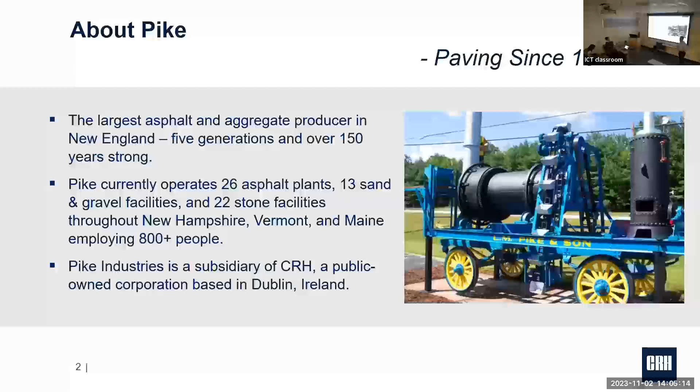Just a little bit about our parent company, CRH. CRH is one of the largest construction building materials businesses in the world, employing over 75,000 people at about 3,200 different locations in 29 countries. And our operations span 29 different countries on 4 continents.

And in North America, we are the largest building material business in this continent, with operations in 48 US states, just besides Alaska and Hawaii, and 7 Canadian provinces. And on the other side of the Atlantic, we are also the largest building material business in Europe, with operations across 23 European countries. And in the Asia Pacific market, we also have a regional leadership position.

So this is what we're going to cover and talk about today. I'll first give a little background information about the Buy Clean policies, the EPD implementation status, the NAPA asphalt EPD generation tool, and the recent NAPA benchmarking effort. And then spend some time to talk about some of the key drivers and improvement opportunities, especially for the asphalt producers and contractors. And then I'll touch on a little bit about the research and implementation needs, not just for the asphalt contractors, but for the whole asphalt industry. And then wrap up my presentation with a couple key takeaways.

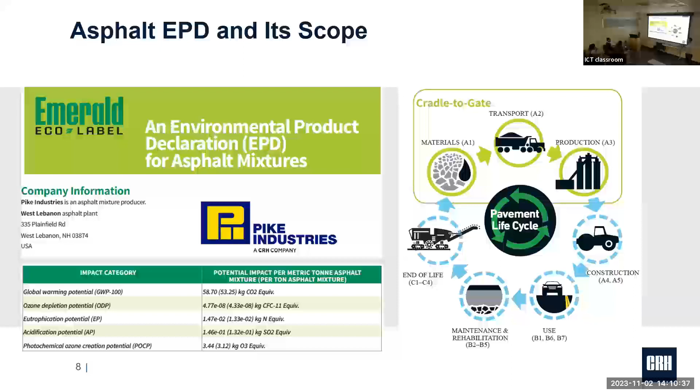This is just a quick peek of the NAPA Emerald Eco Label EPD tool. If you've never seen that or haven't gotten a chance to take a look at it, I would encourage you to check it out just by typing asphaltepd.org.

The tool was designed mostly for asphalt producers to generate asphalt EPDs. However, even if you're not a user or if you're not an asphalt producer, you will have access to all the published EPDs. You can see all the published EPDs from this website, from every state. And if you need any information, for example for research, you can just go into each EPD from each individual state and check out the information.

Another great thing coming with this tool is it has a module called EPD Optimizer, which would allow the user or the asphalt producer to see the impact on EPD from variable changes, such as haul type, haul distance, and fuel type, etc., and get an idea how to possibly optimize the EPD for a specific case.

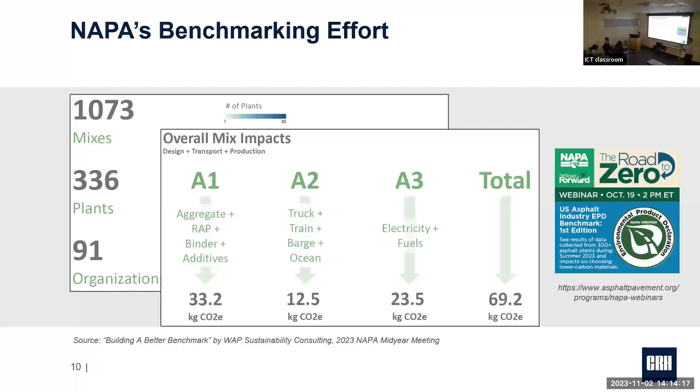All right, next I'll spend some time going over some of the key drivers and improvement opportunities, mainly for asphalt producers and contractors.

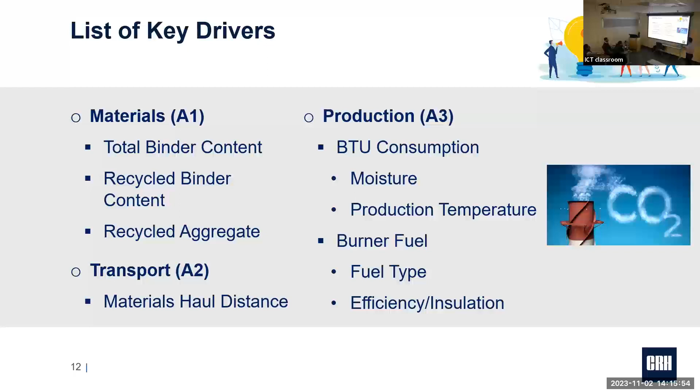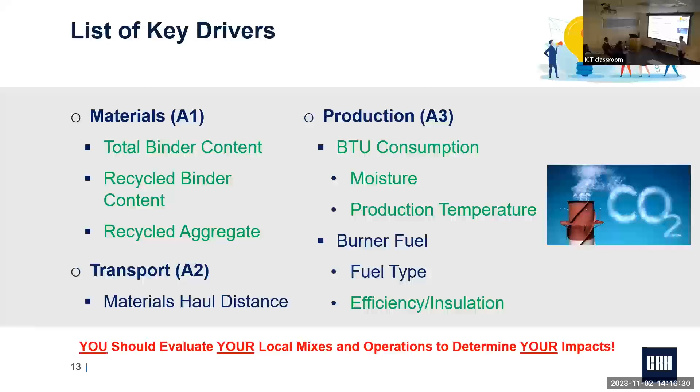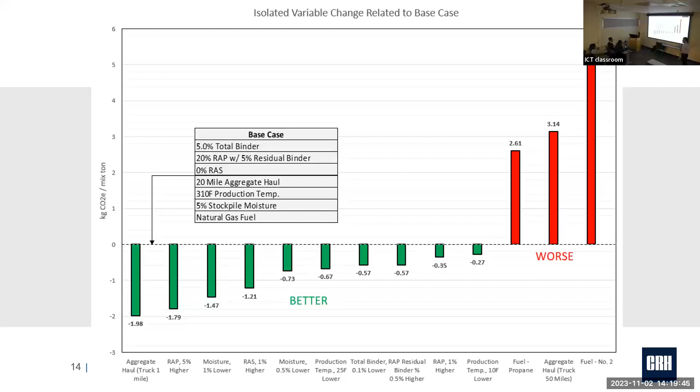And if we don't have any suitable aggregate source within the 20-mile distance and we had to truck further, say 50 miles away, we would see an increase of 3.14 kilograms per mixed ton. So those examples just give you an idea of how each of those different drivers or factors can really affect the GWP or the CO2 from this example mix.

So let's take a further look at a couple of cases or examples at each of the 3 stages: material, transport, and production, and see the sustainability impact and what kind of opportunities may exist out there.

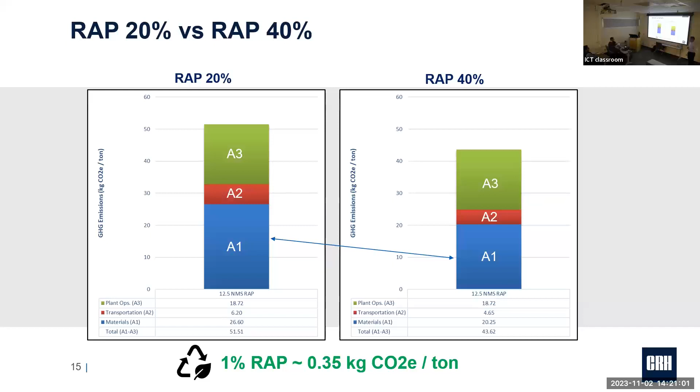So we see the significant sustainability impact as the asphalt producers and contractors. How can we really seize such opportunities? One of the first things for the asphalt producers is to maximize the addition of recycle, especially on non-agency mixes, and take advantage of the rejuvenator to balance out the stiffness and relaxation properties coming from the recycled binder.

And we should also maximize the residual binder in the recycle through better RAP management and processing, and consider the final grind size for the recycled asphalt shingle.

Contractors need to consider and invest in plant modification, such as increasing the recycle bins, changing the flight design within the drum, switching between drum and plant types, and increasing the size of the RAP collar, etc., in order to accommodate higher recycle use through a better feeding system.

Contractors should also limit the moisture in the RAP, and work closely with the specifying agencies on their specifications.

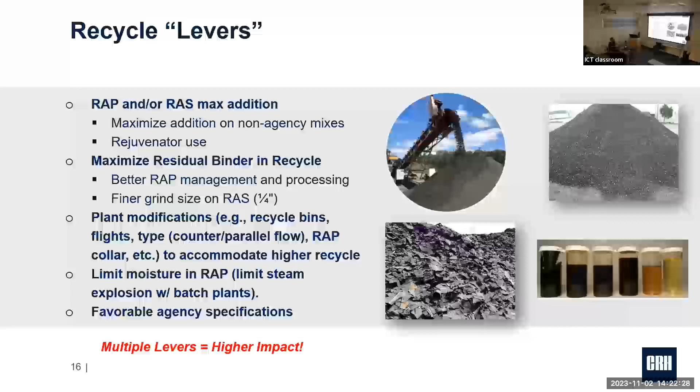Another big part on the material side is the virgin binder demand. Asphalt producers should always right-size the total binder in the mix, especially avoiding over-designing the VMA, as every 0.25% VMA equals about 1/10% of the binder, which would have a sustainability impact of 0.57 kilograms CO2.

Producers also need to consider the asphalt absorption whenever possible when selecting aggregates, because if we compare the aggregate blend with just 1% absorption versus 0.75% absorption, that 0.25% absorption difference would have an impact of 0.72 kilograms CO2.

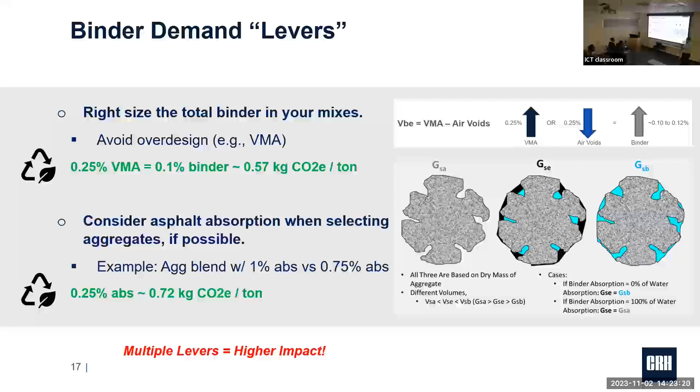At the transport stage, aggregate sourcing and aggregate transport can greatly impact the CO2, especially for aggregate-poor states and regions such as Florida and Louisiana.

So using locally available aggregates can reduce the CO2e impact. However, as a producer and also agency, we need to keep in mind that performance must still be achieved.

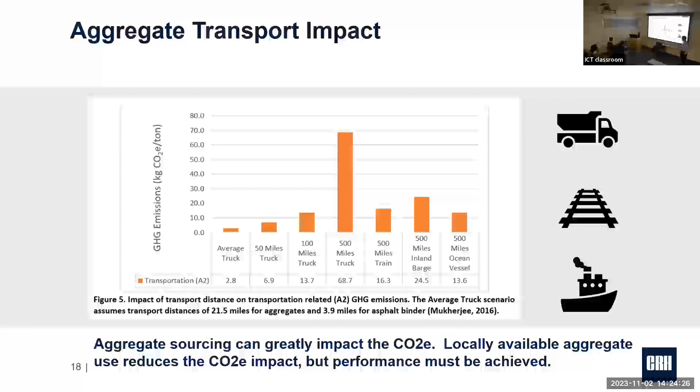On the production side, there are a couple of main areas for asphalt producers to continue working on. The number one thing is stockpile moisture, because moisture existing in the aggregate either needs to be drained out or dried out. Producers need to consider paved and sloped stockpile areas for better drainage, and consider using covers over the stockpile.

There's a rule of thumb called 1-11-11: every 1% moisture reduction in the aggregate can reduce BTU consumption by 11% and increase the production rate by 11%.

Another main area in production is the plant production temperature. Asphalt producers and plants really need to evaluate and determine if a lower temperature is achievable at the company level and also the plant level, just by asking themselves a list of questions like this.

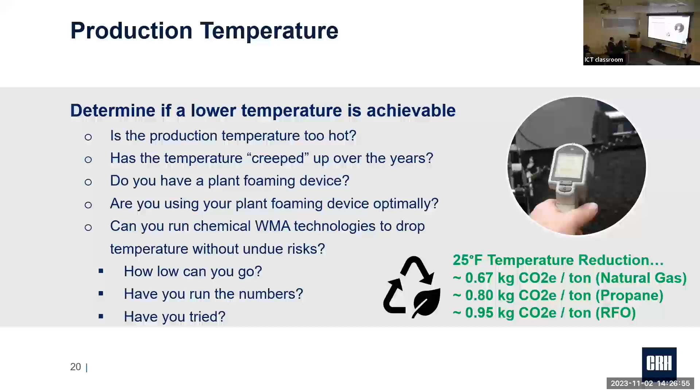We've just talked about a couple examples at each of the three stages, such as the use of recycle and virgin binder demand on the material side, and warm mix or temperature reduction and moisture control on the production side. Here is an overview or summary of the sustainability impact from each of those key drivers.

For recycled asphalt pavement RAP, every 1% RAP has an impact of 0.35 kilograms CO2 per mixed ton. Every 25-degree temperature drop can reduce CO2 by 0.67 kilograms if using natural gas. Every 1/10% binder reduction can lower the GWP by 0.57 kilograms. And every 1% moisture reduction can reduce CO2 by 1.47 kilograms.

So just a disclaimer here: these are just general estimates based on a specific example mix, and everyone's local conditions will drive the actual data.

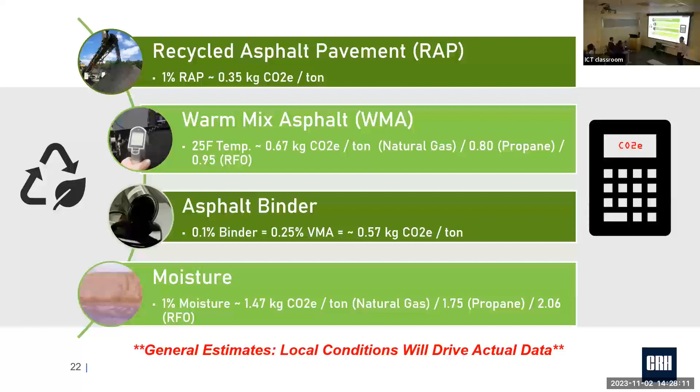All right, next I'll touch on a little bit about the research and implementation needs, especially for the research community, but more for the whole asphalt industry. So on the materials, we need to continue to search new forms of binder and binder replacement, such as biogenic materials like bio binder, bio asphalt, etc. We need to investigate carbon sequestering synthetic aggregates, which have been studied and investigated in the concrete ready-mix industry, but not much in the asphalt area.

And we need to continue to push and increase the use of recycled asphalt materials, especially beyond 40% binder replacement. And we need to look into and research the use of other recycled materials from the circular economy standpoint, such as rubber, glass, and plastics, which is a pretty hot topic these days. And in some specific states, we need to eliminate or reduce the use of hydrated lime, which is a very carbon intensive product. However, we need to ensure the performance by doing so as well.

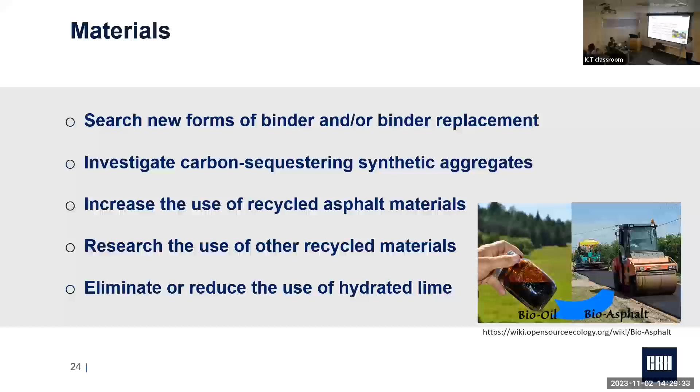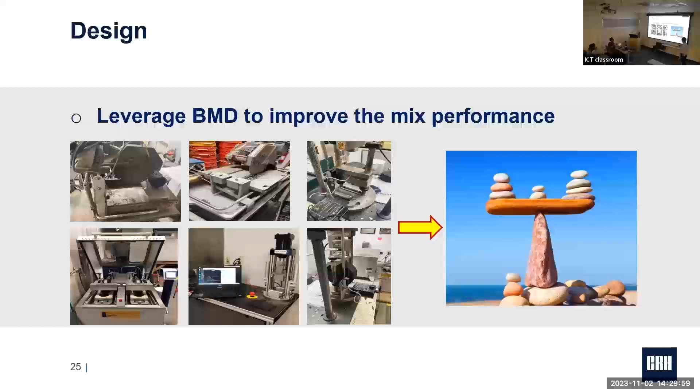So on the mix design, as a producer, we definitely want to leverage balanced mix design to improve the mix performance and optimize the ingredient materials. And producers need to support agencies and work closely with them to develop the BMD specifications. And on the production, we just talked about a few best practices for better moisture control. However, we also need to find a better way to implement those best practices at the company level and at the plant level.

And producers and contractors need to continue to evaluate the temperature reduction technologies, such as warm mix asphalt, half warm mix asphalt, and cold mix technologies. And producers need to consider investment in plant upgrades or increased use of recycle, and also improve energy efficiency, including both electricity and fuel at each of their plants. So NAPA has been working with EPA over the last few years and developed a program called APEX, Asphalt Plant Energy Performance Peer Exchange, which is a great tool for asphalt producers to monitor the energy use at the plant.

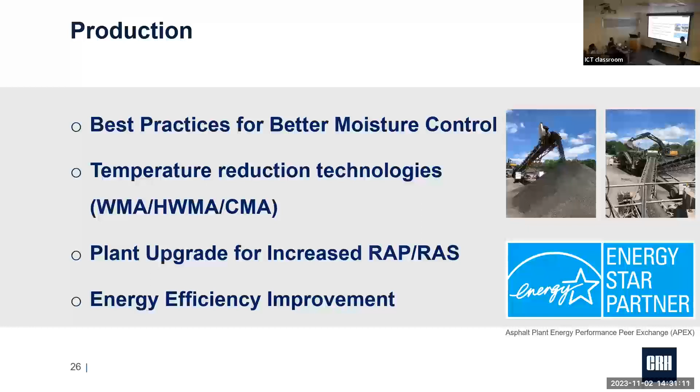So one of the things that I want to highlight is partnering as an industry to lower the asphalt carbon footprint. You might have heard about this from Federal Highway a few weeks ago. Federal Highway launched a program called the Climate Challenge last year, which I believe is a great example of this. The program identified more than 35 projects from 27 agencies, including both state and local agencies, and provided over $7 million together with technical assistance. And one of the specific requirements for all those agencies is to work closely with the industry, including asphalt producers, contractors, academia, and consultants, on those projects.

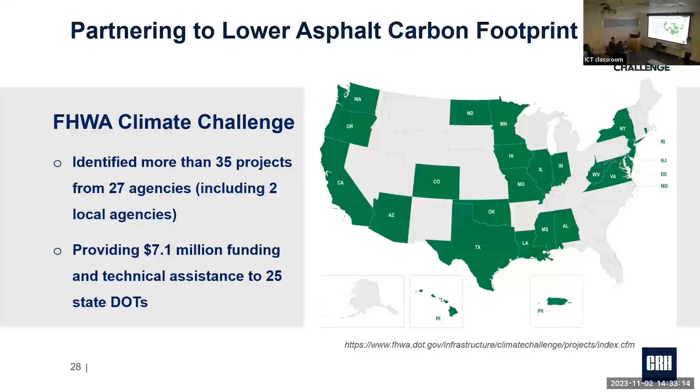All right, just a couple key takeaways to wrap up my presentation. As you probably have noticed, the leading practices that save money almost always have a positive sustainability impact, such as reducing aggregate moisture, lowering production temperature, reducing virgin binder demand, increasing the use of recycle, using locally available aggregate, and so forth. So as the asphalt industry, and specifically asphalt producers, we have another good reason to do the right thing. And besides, sustainability impacts must be considered in the decision-making process. In the cost-benefit analysis, both financial and sustainability need to be included now.

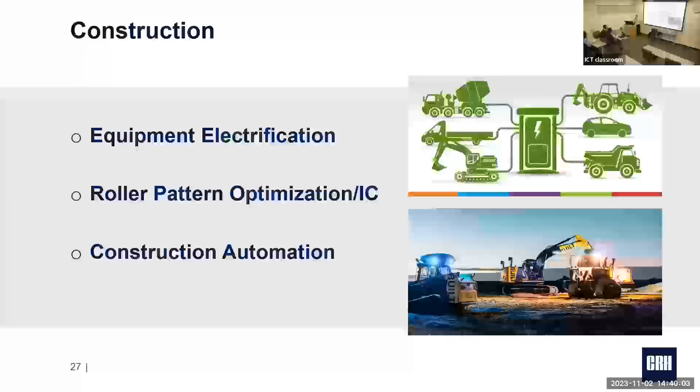It's a great question. So there are a lot of good practices like this, right? But most of them would require some type of investment. And from the company or business standpoint, they're going to evaluate the return, and whether they have CapEx, which is the investment money they can put in. And for some others, it's just inertia. I just don't want to make a change, I just do my job.

And for others, the initiative is beyond my scope. So it happens a lot, believe it or not. Not everyone is as smart as the people sitting here, right? Thinking about the long term, those will pay back pretty soon, but not everybody can realize that. So that's why. And as you said, if everybody can realize the benefits, it's just the low-hanging fruit. Everybody can do it.

Yeah. My question is a little complex, so here we go. Given that you have several plants, let's assume you have a plant A and plant B. The project is close to plant A, but the aggregate is close to plant B. So when you are preparing the EPDs for A and B, B will have a better EPD than A. But A is so close to the project, so in this case there is unfairness in the way we are preparing the EPD. I just thought about this.